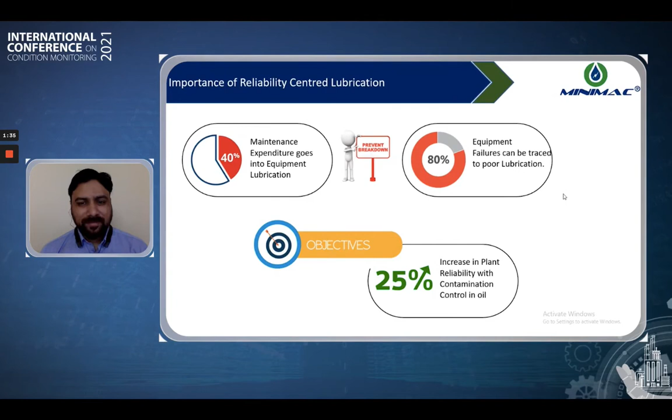The topic of this presentation is achieve reliability through oil reclamation. We all know that maintenance expenditure for equipment lubrication goes around 40%, and it has been found that 80% of equipment failures can be traced to poor lubrication. So for this presentation, we set up an objective to achieve 25% increase in plant reliability by contamination control in the oils.

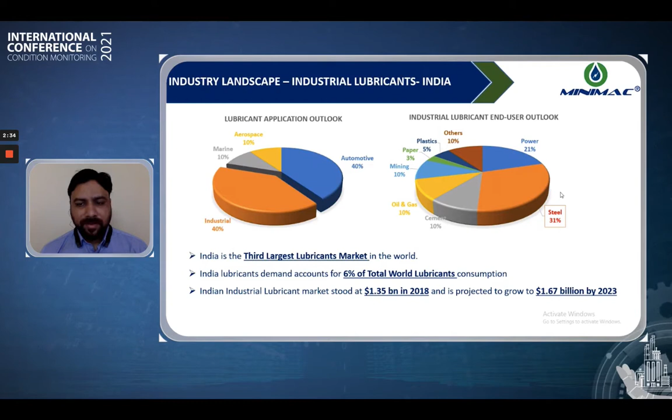For the Indian perspective, if we see the consumption of industrial lubricants, it has been found that around 31% of industrial lubes is consumed in the steel sector, 10% each for mining, oil and gas, and cement sectors, 21% for power generation and transmission sectors, and the rest constitutes around 10 to 20% of paper, plastics and other industries. Today, India is the third largest lubricants market in the world, consuming around 6% of total world lubricants. The size of the lubricant market stands at $1.35 billion in 2018, projected to grow to $1.67 billion by 2023. Now let us segregate the lubricants consumption amongst various industrial sectors.

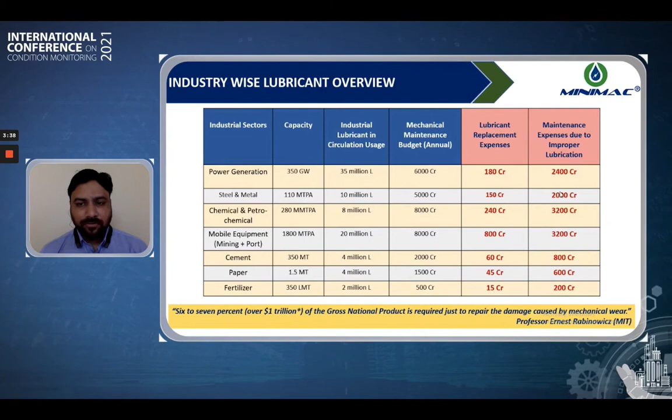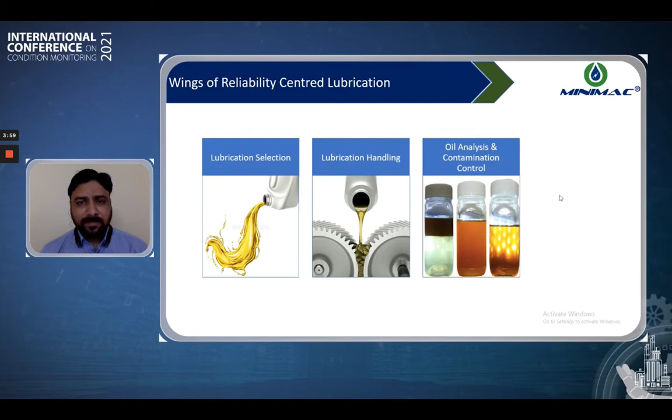Let us understand reliability centered lubrication. There are three wings of reliability centered lubrication: one, lubrication selection; lubrication handling; and oil analysis and contamination control. In this presentation, we will be focusing on the third wing, that is oil analysis and contamination control.

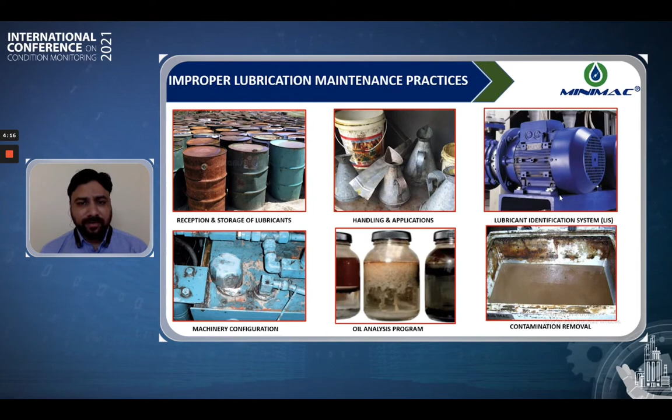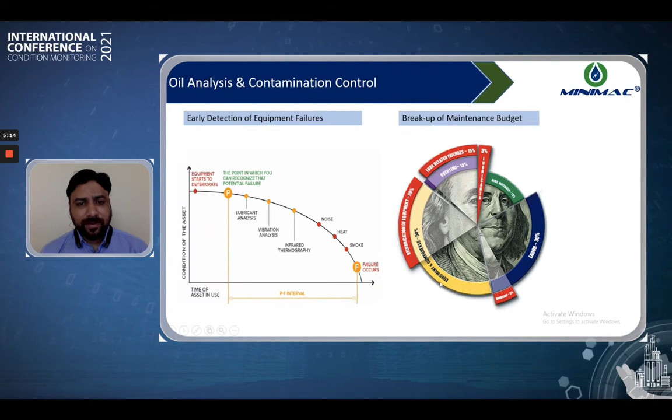40% breakup of the maintenance budget goes for lubrication related concerns. The red pie chart shows the total of lubrication concerns and expenditures which goes towards lubrication concerns.

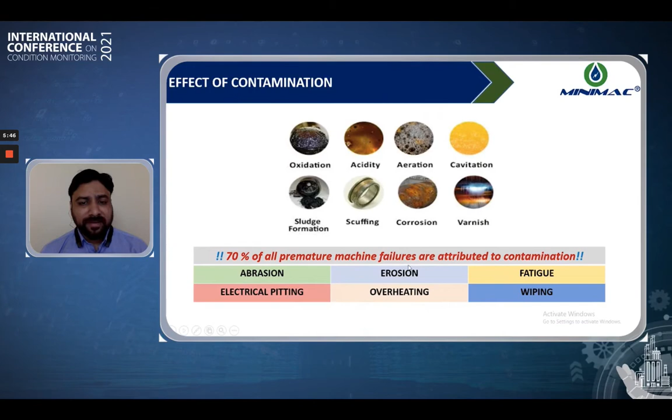What are the effects of contamination in the oil? There are oxidation deteriorations, acid formation, aeration and cavitation. Oxidation leads to sludge formation, scuffing actions in your bearings, corrosion, and the very hazard of varnish formation. It has been found that 70% or 80% of premature machine failures are attributed to contamination in oil.

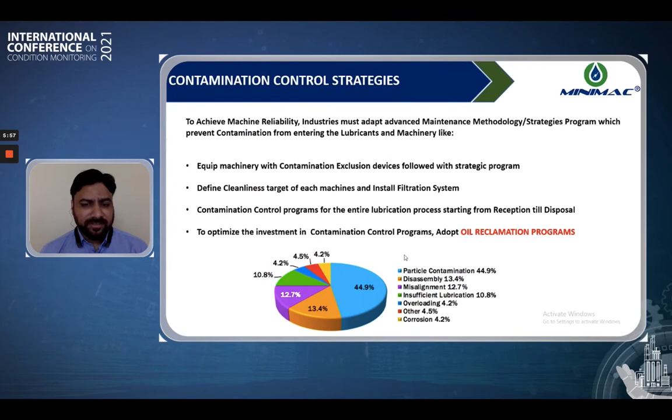So, contamination control strategies - we have various strategies for contamination control and oil reclamation. Let us understand what is reclamation, why do we require reclamation, and where do we require reclamation. Reclamation is restoring the new oil properties for an in-service lubricant. We require it to extend the usefulness of lubricants, to increase the reliability of our machines, to save heavy breakdowns and maintenance expenditures, and more importantly, to reduce carbon emission and environmental hazards and pollution. Where do we require reclamation? We require reclamation for almost every machine under the roof where lubrication is playing a role.

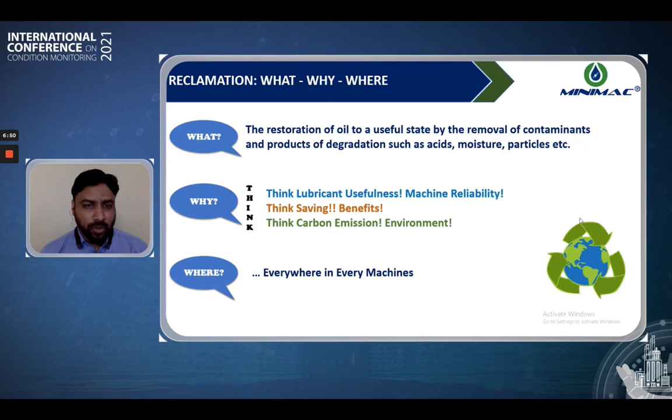Reclamation is already an activity which has been done by multiple plants and is in practice. However, it has been found there are a lot of deviations from the definition of reclamation versus the actual practices that plants have been doing and performing in real life. Reclamation means restoration of the in-service lube oil properties for a healthy system. However, mostly we get confused with the fact that reclamation will be required only for waste oil, which has already completed its useful life in a machinery.

An oil analysis report is very important to make the decisions of reclamation. However, the real practice is that oil analysis reports are taken up as a formality and they are piled up in files. Reclamation is a savings to the company, hence people should not overlook it as an extra expenditure to their company. There are multiple factors which must be taken into consideration before you select the right vendors or contractors who are performing reclamation activity for you, or who are supplying you equipment for lubricant reclamation. However, in current practice, the L1 price basis, only considering the lowest price, is considered for selection of reclamation practices.

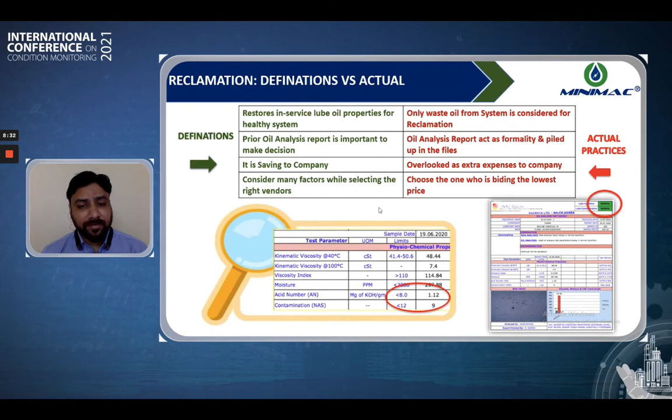Let's understand the application of lubricants and the associated challenges in the steel manufacturing plants.

We have categorized the steel making process into three different classification areas: iron making, steel making, rolling and finishing. Under all these classifications, there are multiple plants, equipment, and application areas where lubricants play a very important role and have a huge impact on plant reliability and maintenance.

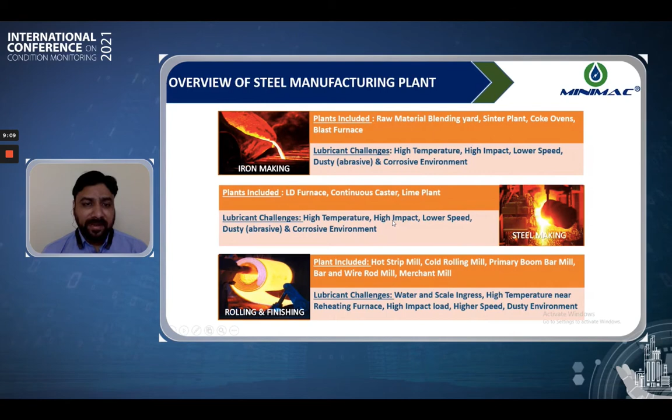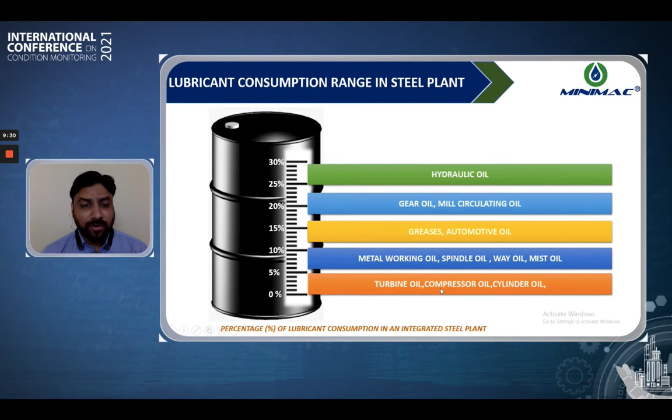It has been found that in the steel industry, huge quantities of lubricants are consumed. Lubricants can be of the type hydraulic oil, gear oil, mill circulating oil, greases, automotive fluids, metalworking fluids, turbine lube oils, compressor lube oils, and so on and so forth.

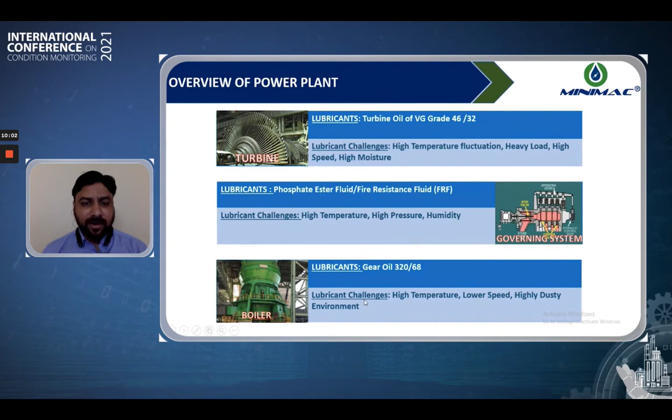The power generation sector also involves huge quantities of lubricants for critical areas and lubrication segments. For example, the control system or governing system involves specialty lubricants called phosphate esters or fire resistant fluids. Then you have the coal mills of the boiler department, where again you have high temperature, slower speed, high viscosity lubricants used for gear oil applications.

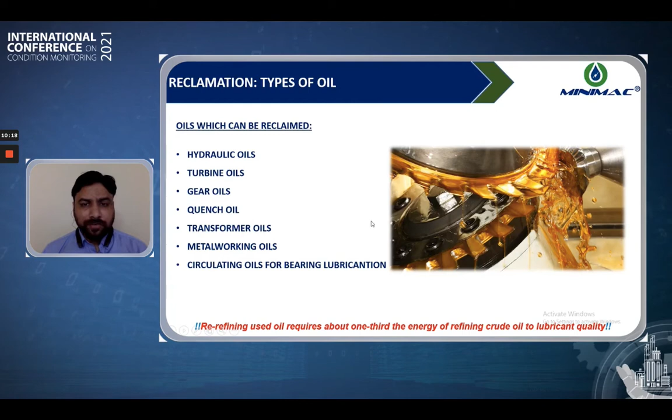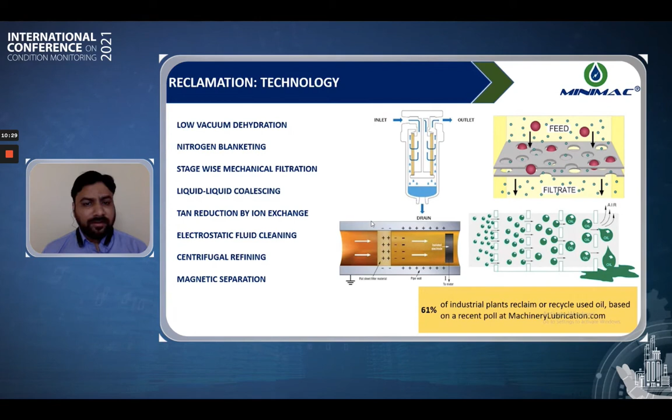The first two are mechanical filtration. Mechanical filtration, as the name denotes, means to separate solid particles only. The next in the lot is centrifugal separation. Centrifugal purifiers are very helpful in removing solid contamination and free water from the oil.

However, there is a limitation when it comes to removing dissolved moisture content, acids, sludge, and varnish formation from the oil. Coalescer separation is also equally good as the centrifugal separation technique. However, it also has a similar limitation in that it cannot remove dissolved moisture content, and it cannot remove sludge, varnish, or acids from the oil or lubricant.

Then we have in the lot dehydration systems, which are vacuum based. These systems have proven very good for removal of all three forms of moisture: dissolved, emulsified, and free form. We have the electrostatic separation technique, which is very good for removal of fine particles from the oil.

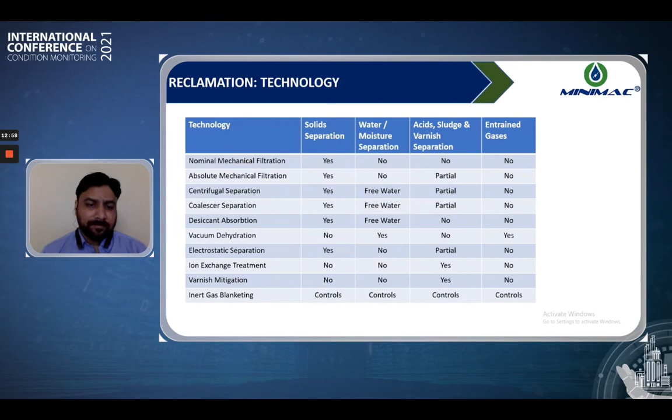Ion exchange treatment is very applicable for removal of acid content and varnish from the oil, and the most important, inert gas blanketing. Inert gas blanketing is very essential for areas with humid air in the environment, because when carried out for a particular lubricant tank, it can ensure there is no humidity exchange between the air and the lubricant inside the tank. So this is about the reclamation technologies.

Oil condition monitoring is a very important aspect for any lubrication program. There are multiple tests which can be performed on a lubricant. However, there is a certain frequency which one needs to follow.

At the same time, you need to have proper benchmark or threshold values for all these parameters, and these would depend upon the machinery or lubricant application you are using in your plant. Hence, if someone is using a particular threshold value for a condition monitoring program in a steel plant, it's not necessarily true that the same values will apply to a power plant. It depends sheerly on the application area and the machinery for which you are doing the lubrication.

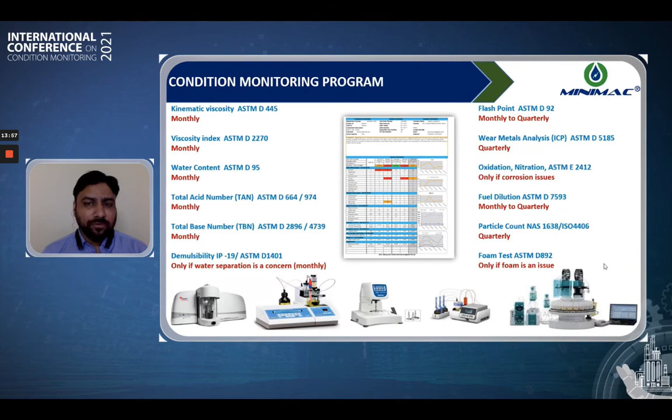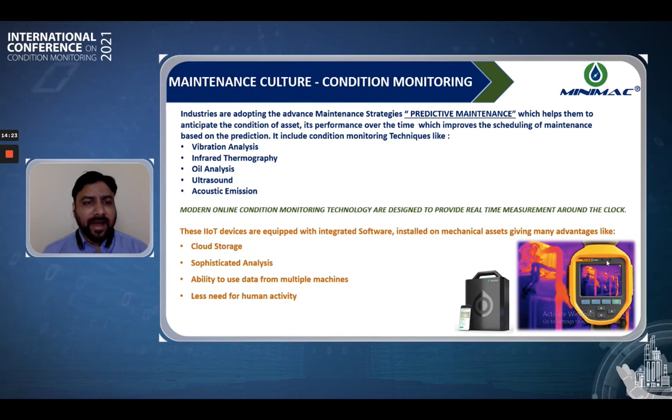There is an important maintenance culture which needs to be brought in, which will call for vibrational analysis, infrared thermography, oil analysis, ultrasound, and acoustic emissions. Nowadays, IIoT devices have come in which gather all this plant data and take it into the cloud for proper referencing in future trend monitoring programs.

The reclamation of lubricants can extend oil life. It can increase your machine reliability, reduce environmental contamination. It has a lot of cost saving on oil replacements. Your time, effort, and maintenance budgets will decrease because of reduced oil changes. There would be lesser waste disposal, low carbon emission, and sustained development in your plant.

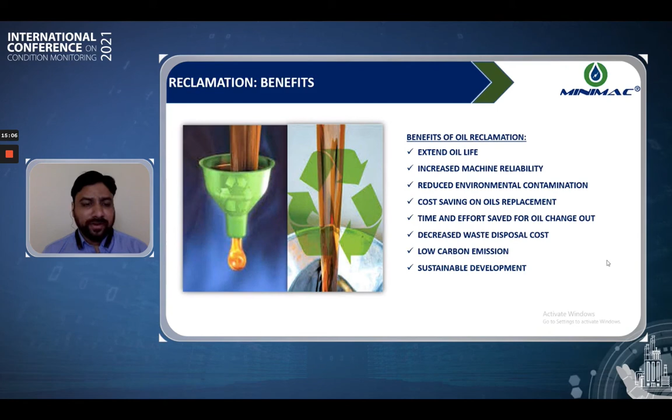Hence, there is a huge economic justification for reclamation, wherein you are saving multiple costs in your maintenance budget and thereby achieving your targets of cost reduction or cost optimization.

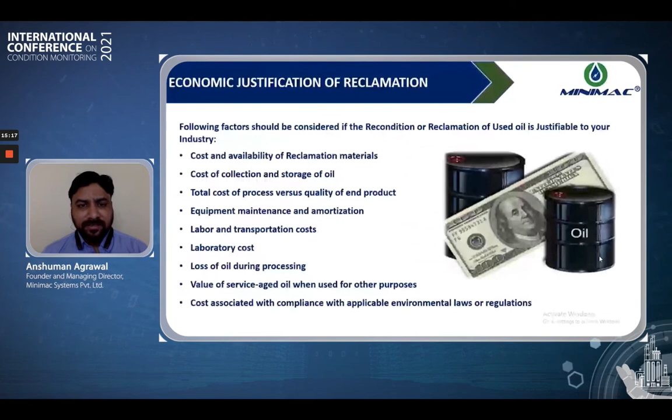There is a certain case study we can understand. We studied this for a particular power plant in India, which has got Indo-Japanese technology for the turbine EHC system, where the cost of oil replacement is around 44 lakh Indian rupees. Cost of downtime is around 1.05 crore for a 15-hour downtime. The cost incurred for oil reclamation was only 2 lakh rupees.

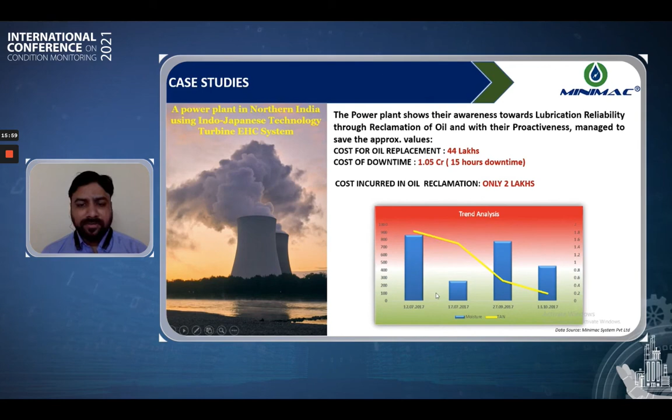There is a trend chart shown here, where the TAN values, or acidity content of the lubricant, have been brought down. The moisture levels as well have been kept below the permissible limits over the course of the reclamation activity.

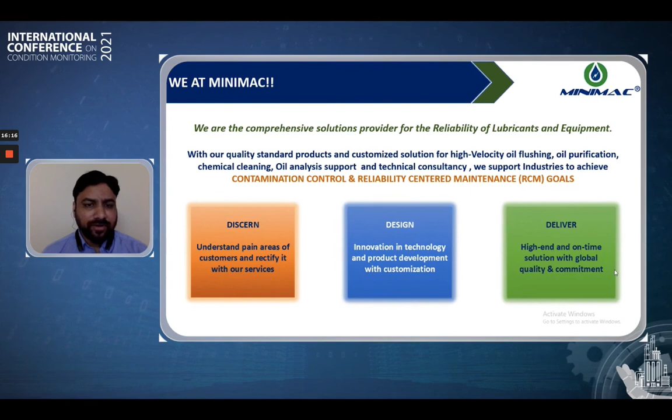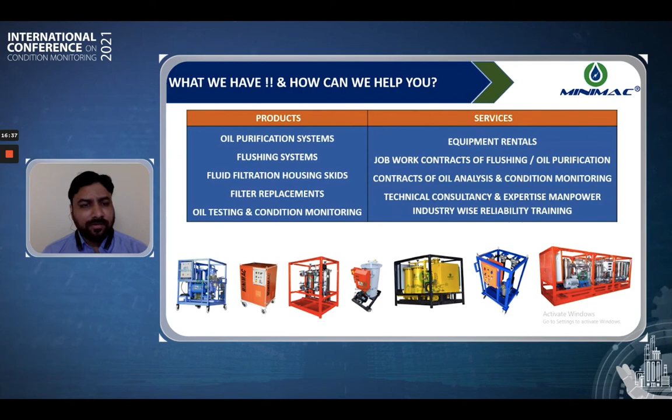What does Minimac do? Minimac is an organization which does a lot of activities towards products and services in the field of lubrication reliability. There are multiple products and services we deal in, like oil purification systems, flushing systems, filtration housings and skids, filter replacements, and testing, control, and monitoring devices for your lubricants. There are a lot of services which can be stitched around these products and requirements.

There are multiple customers and sectors where the company is operative.